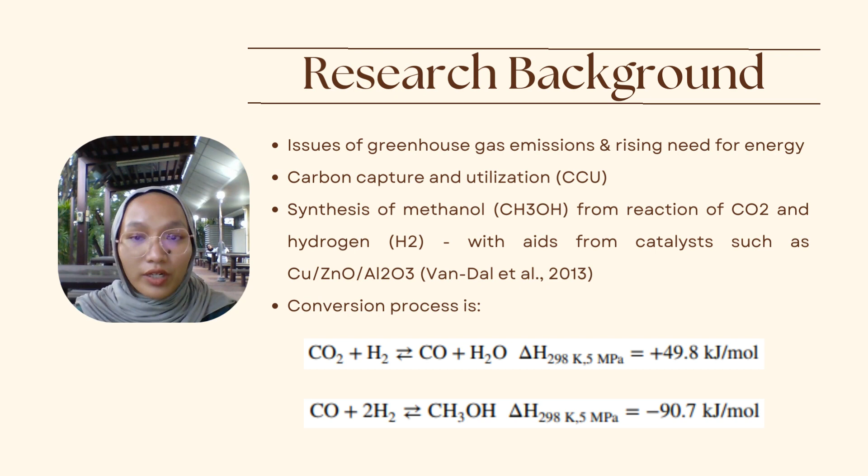which brings to the main base of this research, which is methanol synthesis from CO2. CO2 is used as raw material that undergoes hydrogenation to produce methanol. CO2 is hydrogenated to methanol with the aid of catalysts such as copper, zinc oxide, and aluminium oxide, according to Van-Dal et al. 2013.

Gas hourly space volume (GHSV) is defined as the volume flow rate per catalyst volume and has units of inverse hour. According to an article by Nakisa Yaghobi, different GHSV can alter the quantity of methanol; in this case, the conversion rate of material being experimented using the parameter of GHSV may increase with decreasing GHSV. This means that the bigger the GHSV, the lower the conversion rate, and if the GHSV is lower, the conversion rate is higher.

So in this research, a large scale of operating parameters, pressure, temperature, GHSV, and molar ratio, can give out danger as risks are exposed due to high values of these operating parameters. Inherent safety concept is applied throughout this study in the case of different pressure, GHSV, temperature, and molar ratio with different chemical quantity.

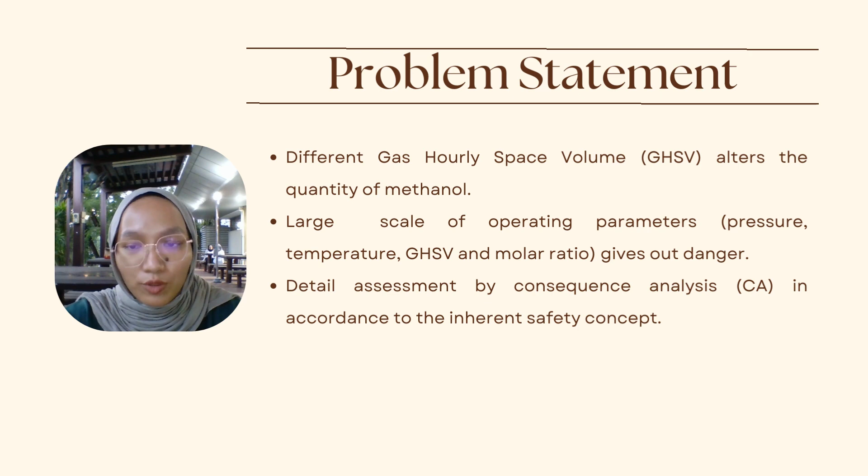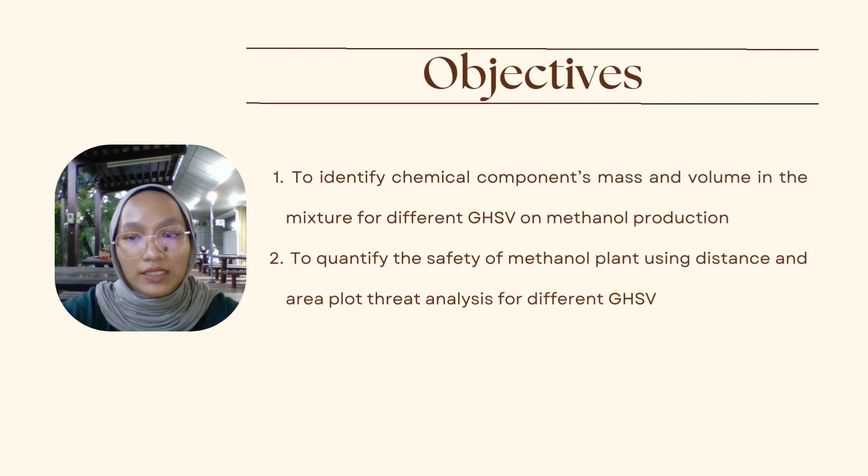The main objective of this study is to identify chemical components, mass, and volume in the mixture for different GHSV on methanol production. And the second objective is to quantify the safety of methanol plant using distance and area plot threat analysis for different GHSV.

This research is conducted to analyze the impact from possible release of chemicals such as CO2, carbon dioxide; H2, hydrogen gas; CH3OH, methanol; CO, carbon monoxide; and H2O, water, in three methanol plant reactors in Perak by applying different GHSV.

The identification of the chemical components, mass, and volume in the mixture for different GHSV on methanol production, which is objective number one, will be simulated using HYSYS software, while objective number two, the quantification of safety of methanol plant using distance and area plot threat analysis for different GHSV, is simulated using Aloha, Marplot, and Google Earth Pro software.

The main aim for this, the main focused section for this research is the methanol reactor section, as the consequence accident analysis is only focused on the methanol production plant and is about the safety of the methanol production plant, which is why we will only focus on the methanol reactor section for all three methanol production plants.

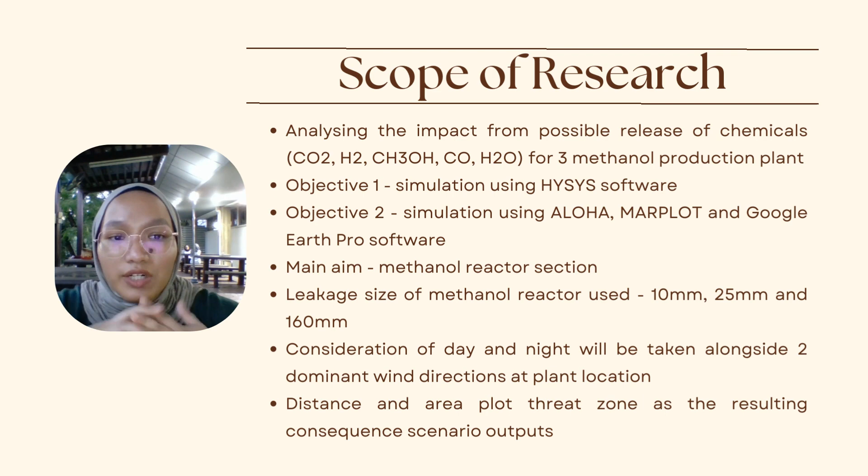And the leakage sizes of the reactor that will be used are 10 millimeter, 25 millimeter, and 160 millimeter. Apart from that, the consideration of day and night will be taken alongside the two dominant wind directions in Perak. The result of the consequence scenario outputs will be the distance and area plot threat zone.

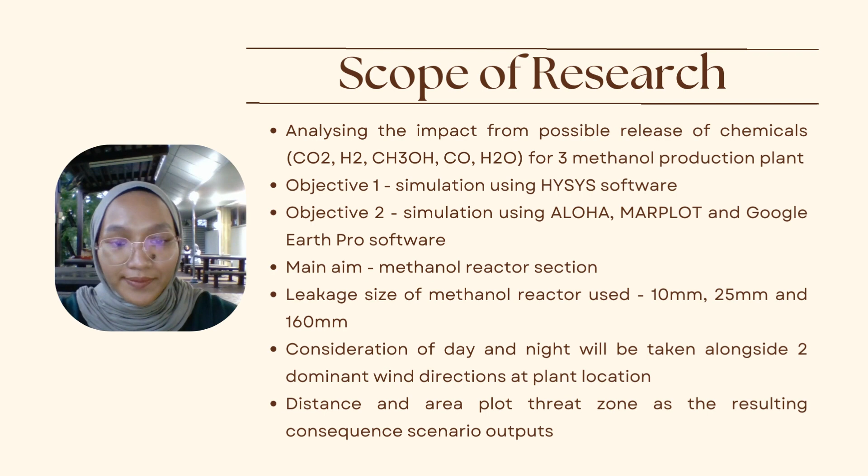A study by the Trends in Atmospheric Carbon Dioxide has shown that the current carbon dioxide concentration as of 2020 has exceeded 412 ppm and has reached above 418 ppm ever since. This is a great opportunity to apply carbon capture utilization, CCU, and use it as a raw material to produce methanol. This will indirectly save costs of the original raw materials in order to produce methanol, and also we can sustain the environment by fully utilizing carbon dioxide.

The conversion of carbon dioxide to methanol exists and has been found in two methods: the first one is hydrogenation of CO2 as a one-step conversion, and the second technique is the reverse water gas shift, RWGS, as a two-step conversion.

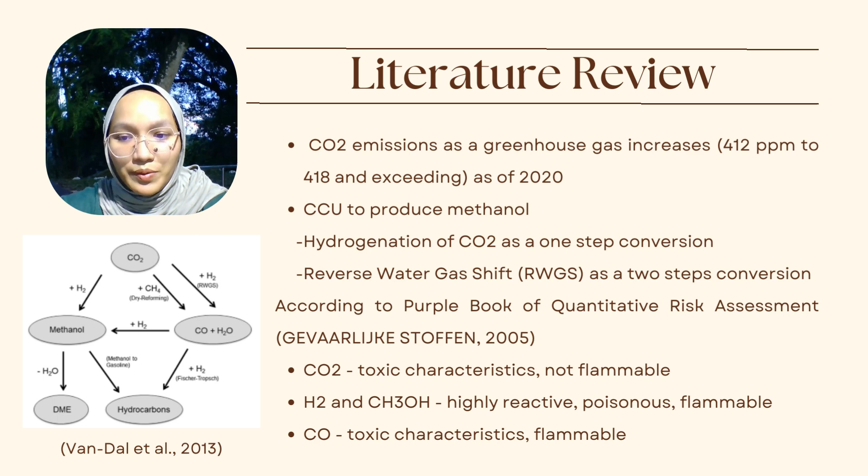The aim of this study is to identify the mass and volume of chemical components in the mixture of three methanol production plants at different gas hourly space velocity (GHSV) simulated in HYSYS version 11. Apart from that, the study is also conducted to quantify the safety of the plants using distance and area plot threat analysis for unequal GHSV using ALOHA, MARPLOT, and Google Earth Pro software.

This study will also be carried out referring to the process condition of the reference plant by Pérez-Fortes et al. 2016 that studied the potential impact of the production of methanol using CO2 as raw material. The plant is operated by capturing CO2 from the flue gas of a power plant as raw material, implementing the post-combustion method. The process condition that will be observed is the effect of different GHSV on the safety of the methanol plant.

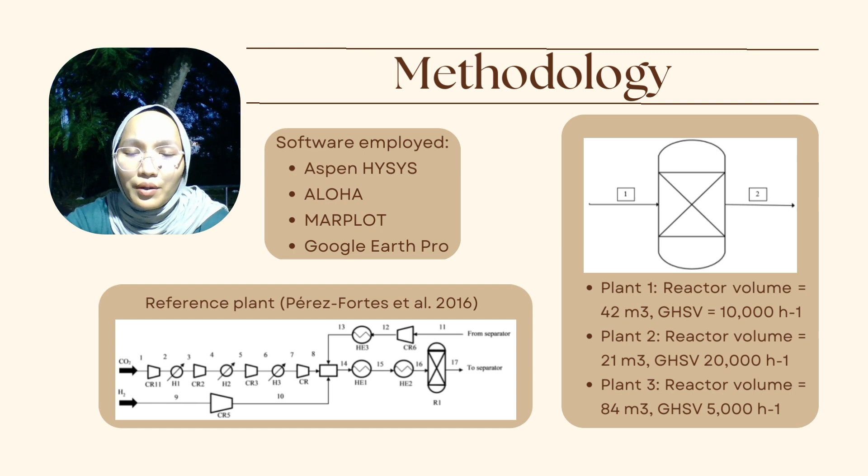Plant 1 will be operated using a reactor volume of 42 cubic meters and a GHSV of 10,000 inverse hour. Plant 2 will be studied using a reactor volume of 21 cubic meters with 20,000 inverse hour of GHSV, while plant 3 will be observed using a reactor volume of 84 cubic meters with a GHSV of 5,000 inverse hour.

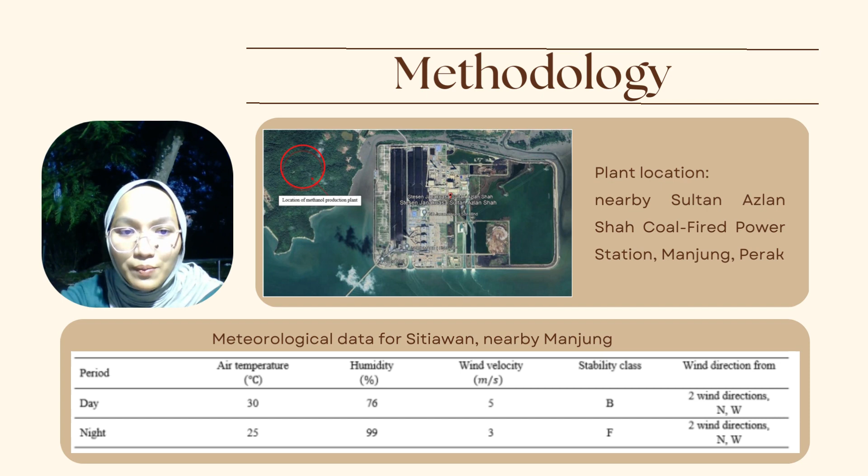The methanol production plant is situated in Manjung, Perak, Malaysia, nearby a coal-fired electric power plant, the Sultan Azlan Shah Power Plant. This location is strategic as CO2 released from coal combustion can be captured and supplied directly to the plant to be utilized as the raw material. Meanwhile, the weather condition in the area is evaluated according to the weather around Sitiawan, an area nearby Manjung. The meteorological data consists of air temperature, humidity, wind velocity, stability class, wind direction, as well as the period of the day in Sitiawan.

To quantify the consequence accident analysis in the case of a fatalities scenario, the number of people in the plant during day and night is calculated by interpolation. So after interpolating, for a plant that produces 12,371 tons of methanol per day, there will be 82 workers during the day and 74 workers during the night. Meanwhile, the number of people in the surroundings is obtained from the population in the plant area. After searching for the population, it is found that there are 246,977 residents that live nearby the plant area.

And apart from that, the chemical hazards and consequence scenarios are also determined. The consequence scenarios are determined as toxic and fire, as in thermal radiation.

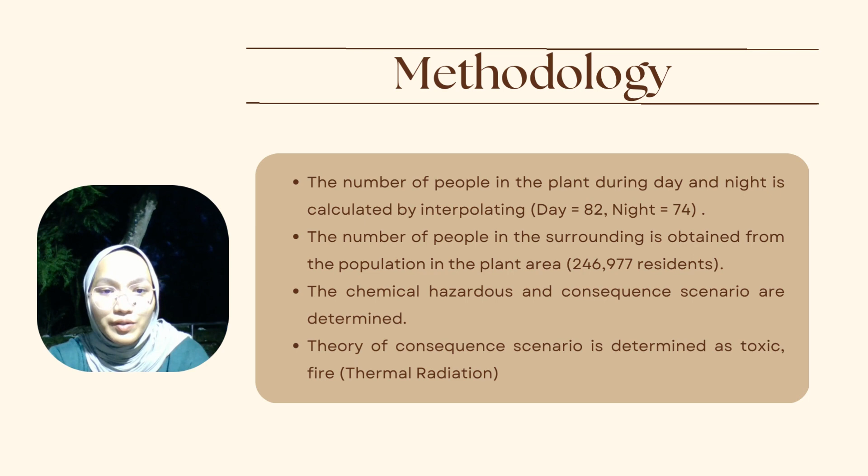So that is the end of my presentation. Thank you.